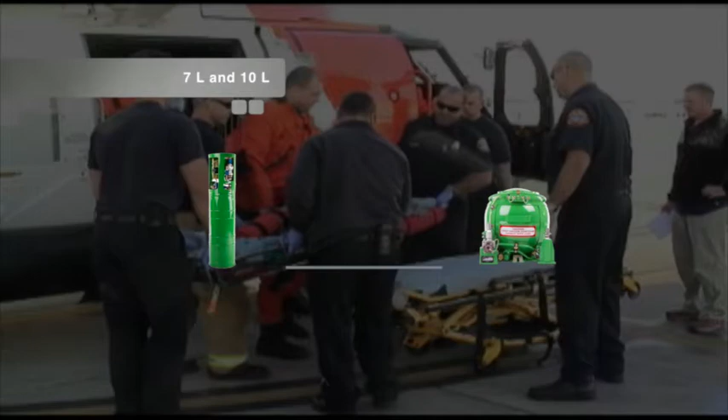The following information should be used as a general guide for the inspection and maintenance, filling, draining, purging, and testing of the 7-liter and 10-liter liquid oxygen converters. These units are instrumental in creating an oxygen system capable of supplying gaseous oxygen for patient therapy, and are used on board rotary wing and fixed wing aircraft to store oxygen in liquid form.

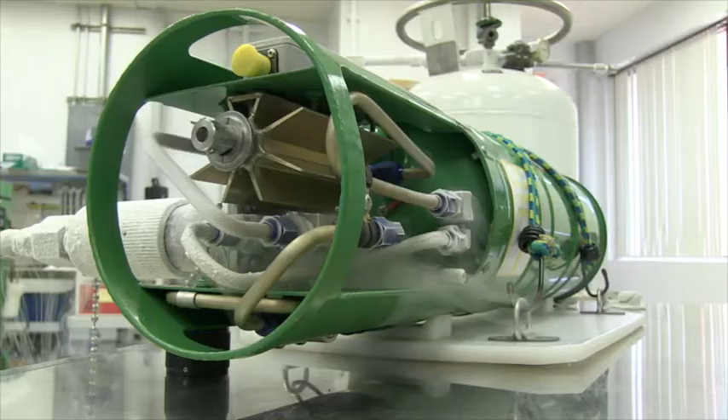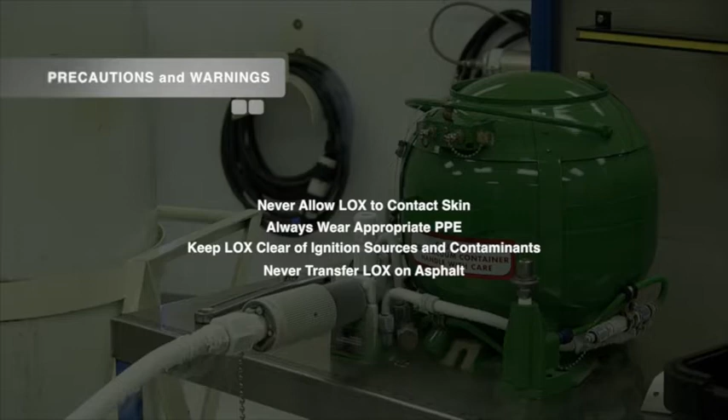Before beginning any of the following procedures, take time to become familiar with the risks associated with liquid oxygen. Never allow LOX to contact skin. Always wear appropriate personal protective equipment, also known as PPE. Be sure to keep LOX clear of ignition sources, contaminants, and remember to never transfer LOX on asphalt. For more details on LOX precautions, handling, hazards, and properties, refer to your specified document, operator's manual, technical order, or equivalent.

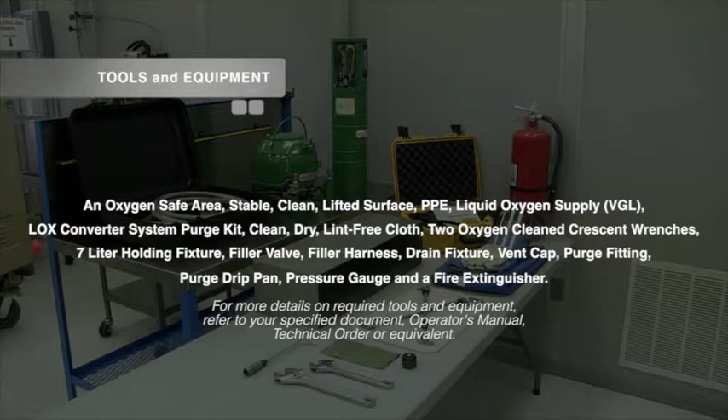To prepare for inspection and maintenance, filling, draining, purging, and testing of the 7-liter and 10-liter LOX converters, it is a good idea to first gather all the required tools and equipment needed for each procedure. Items needed include an oxygen-safe area to perform the procedures, a stable, clean, lifted surface such as a counter or table, personal protective equipment or PPE, a liquid oxygen supply such as a VGL, a liquid oxygen converter system purge kit, a clean, dry, lint-free cloth, 2 oxygen-clean crescent wrenches, a 7-liter holding fixture, a filler valve, a filler harness, a drain fixture, vent cap, purge fitting, purge drip pan, pressure gauge, and a fire extinguisher. For more details on required tools and equipment, refer to your specified document, operator's manual, technical order, or equivalent.

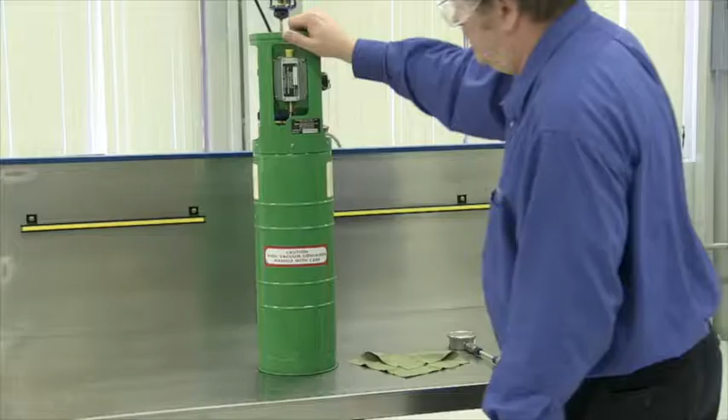It is recommended to complete a general inspection on the LOX converter units at least once a month. When performing general inspections, be sure to check the converter for any damage that could possibly affect system performance, such as broken or missing components, severe dents, or missing fasteners.

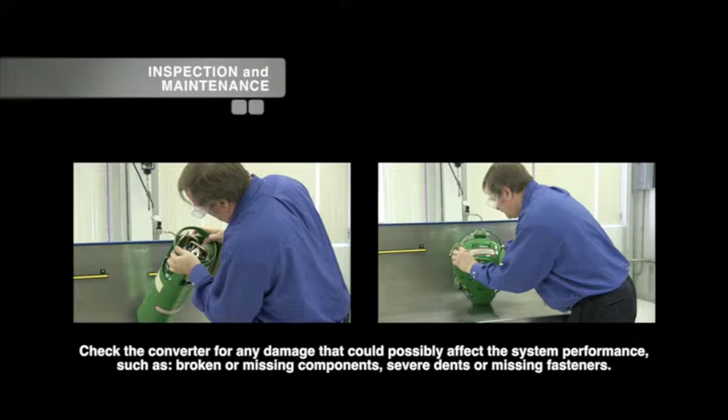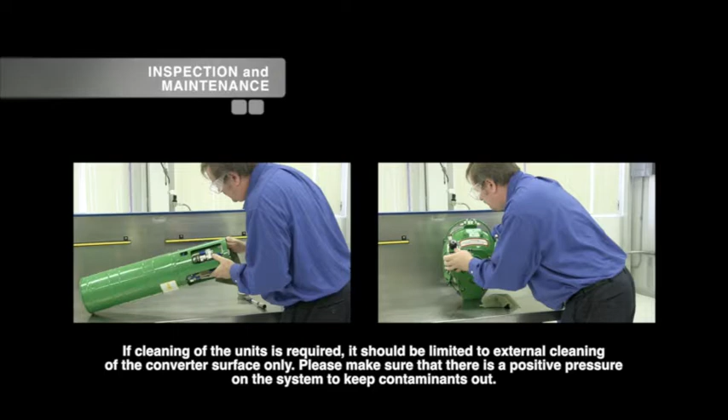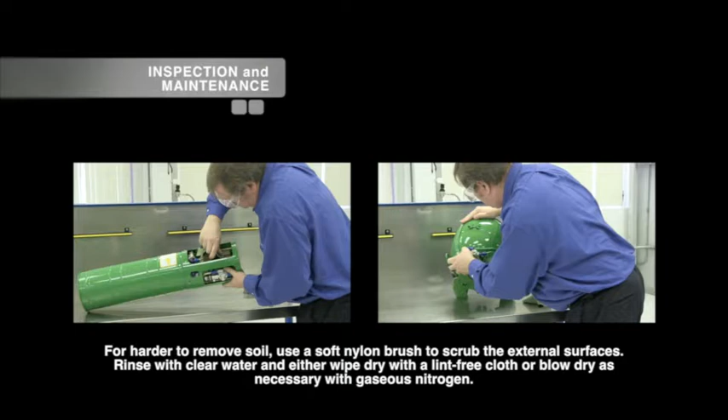If cleaning of the units is required, it should be limited to external cleaning of the converter surface only. Please make sure there is a positive pressure on the system to keep contaminants out. To properly clean the units, use a soft lint-free cloth and a solution of soap and water. For harder to remove soil, use a soft nylon brush to scrub the external surfaces. Rinse with clear water and either wipe dry with lint-free cloth or blow dry as necessary with gaseous nitrogen.

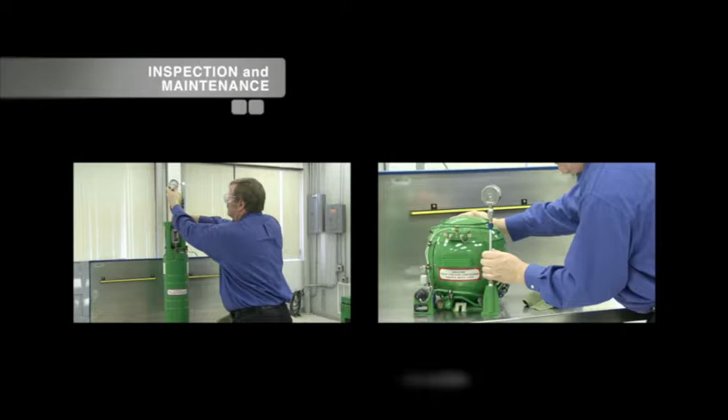If any condition exists from the preceding inspection steps that make the system unable to perform its intended function, return the system to an appropriate repair facility for corrective action. For more details on unit inspection or maintenance, refer to your specified document, operator's manual, technical order, or equivalent.

Before beginning the filling procedure, please note that those persons not directly involved in oxygen servicing operations should stay outside of a 25-foot radius of the liquid oxygen servicing area. Servicing personnel, please ensure that appropriate PPE is donned and that your hands, feet, clothing, etc. are clean and free of petroleum-based products before filling.

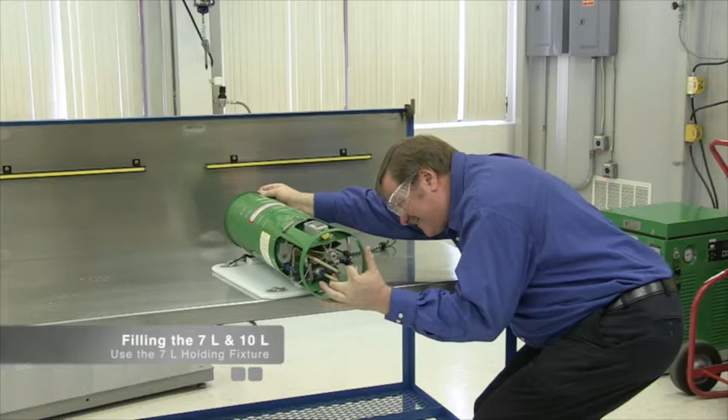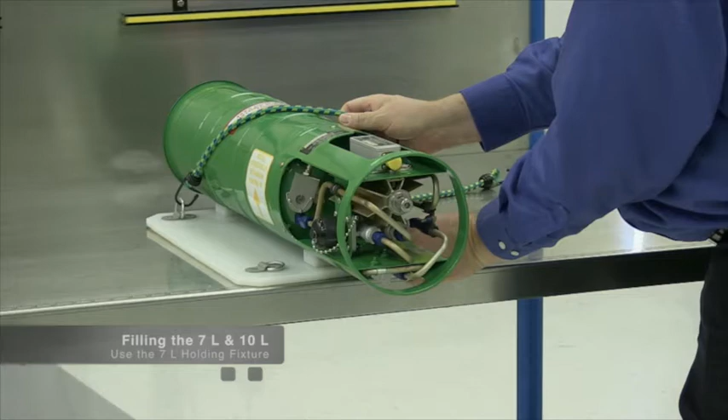While the 10-liter converter sits flat and level, the 7-liter can be filled in either a vertical or horizontal orientation. It is recommended to fill the 7-liter in the horizontal position. To fill the 7-liter in the horizontal position, a holding fixture should be used for proper holding and orientation. Note, if filling the 7-liter in the vertical position, be sure that LOX from the vent port does not collect on top of the converter. This could freeze the vacuum pot plug, causing degradation of the container vacuum.

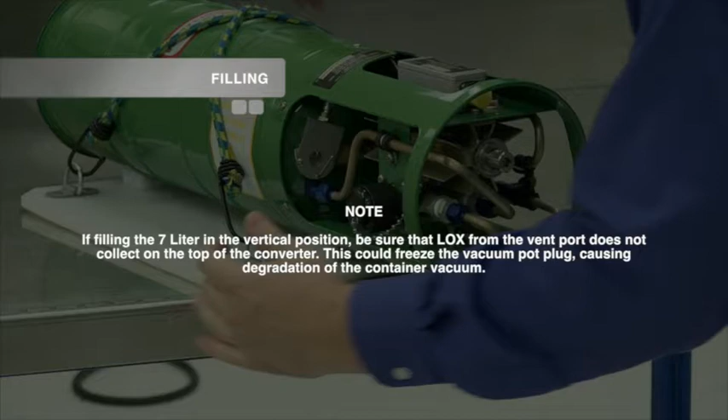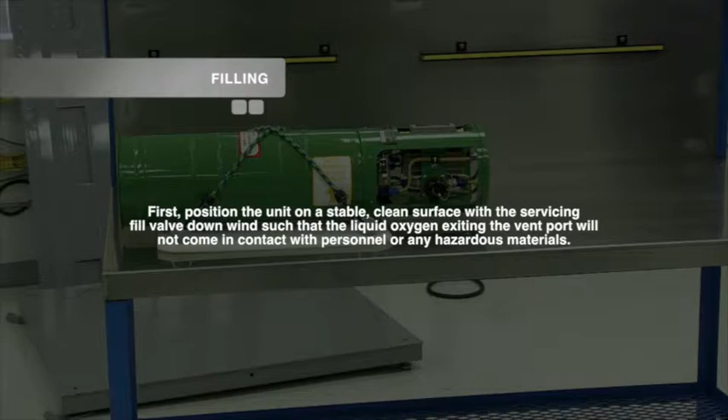To begin the filling procedure, first position the unit on a stable, clean surface with the servicing fill valve downwind such that the liquid oxygen exiting the vent port will not come in contact with personnel or any hazardous materials. Ascertain that the vent openings on both the LOX servicing tank and the unit to be filled are unobstructed.

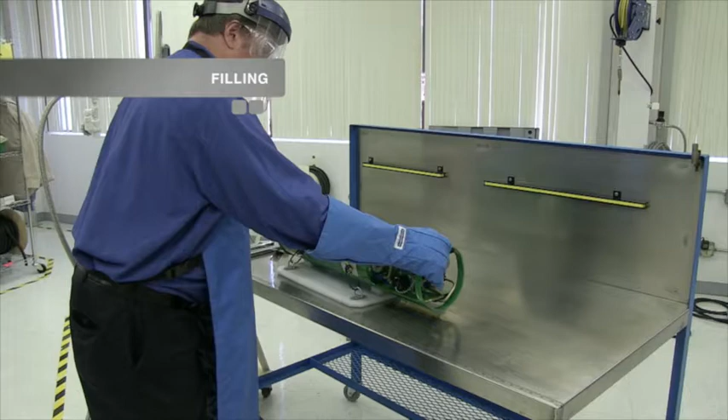Locate the converter fill port and remove the valve dust cap. Inspect the opening of the converter fill valve and the servicing hose fill valve for contamination or moisture. Remove any contamination or moisture with a dry, clean, lint-free cloth.

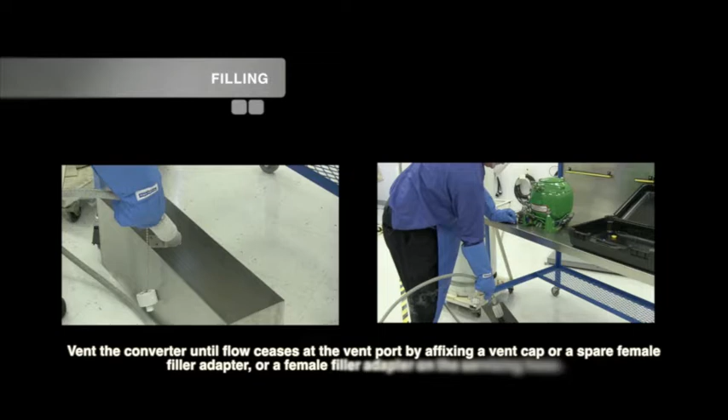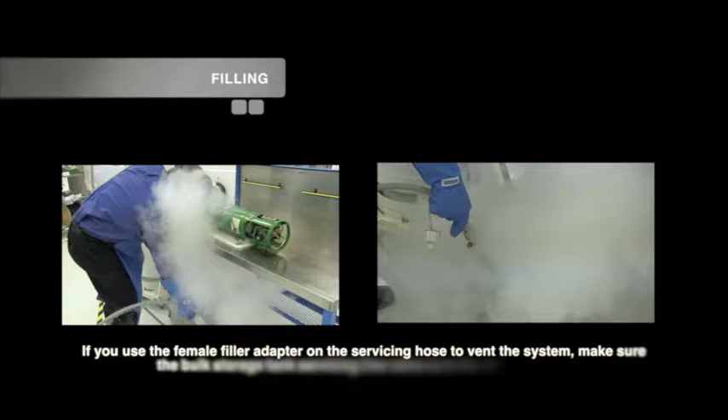Vent the converter until flow ceases at the vent port by affixing a vent cap, or a spare female filler adapter, or a female filler adapter on the servicing hose. If you use the female filler adapter on the servicing hose to vent the system, make sure the bulk storage tank servicing line valve is in the off position.

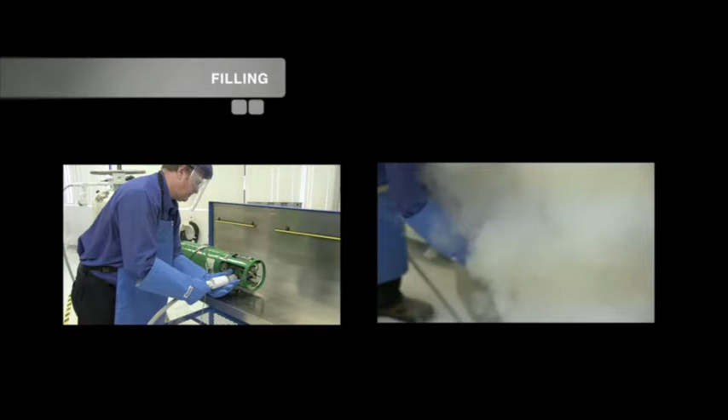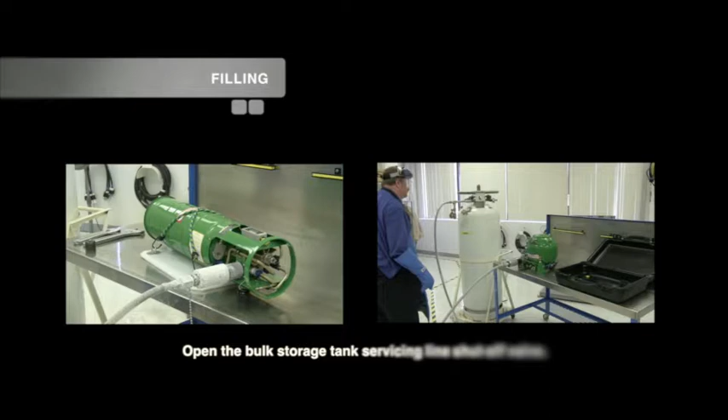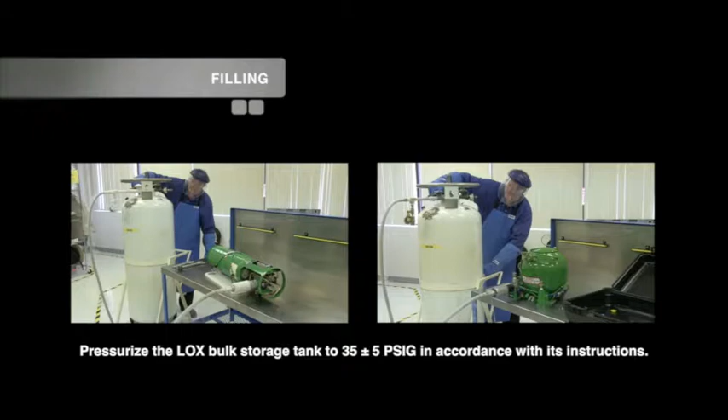Connect the servicing hose filler adapter to the converter fill valve and proceed to fill in accordance with the instructions from the servicing tank. Open the bulk storage tank servicing line shutoff valve. Pressurize the LOX bulk storage tank to 35 plus or minus 5 psig in accordance with its instructions, and maintain that pressure in the storage tank.

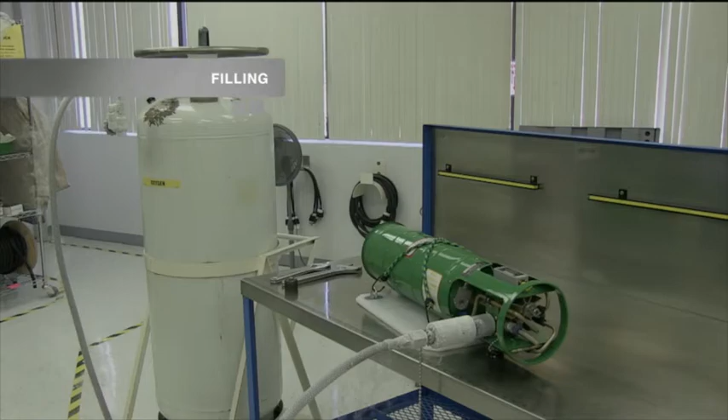Leaking from any component or connection is a potentially dangerous situation. Any steady drip from a servicing nozzle that can be contained in the drip pan of the system is acceptable. Holding the hose, thereby removing the downward tension from the connections, can sometimes eliminate dripping.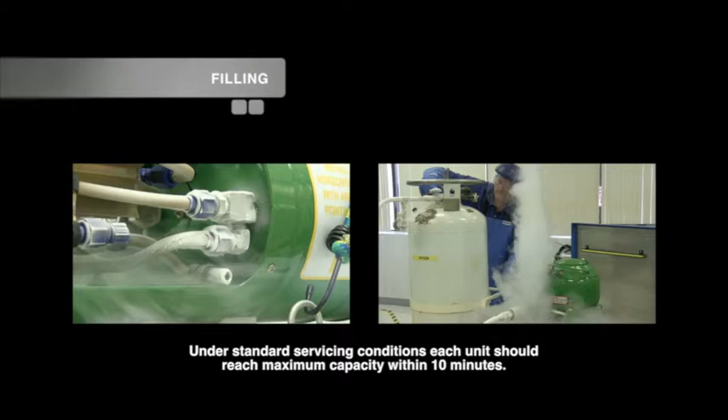Under standard servicing conditions, each unit should reach maximum capacity within 10 minutes. When a continuous stream of LOX flows from the vent port of the unit, disconnect the servicing hose from the unit, close the servicing hose shutoff valve, and vent the storage tank in accordance with the instructions provided. Reinstall the dust cap on the converter fill port.

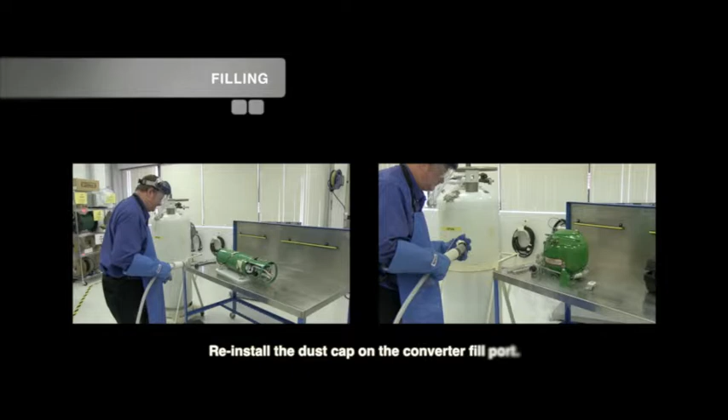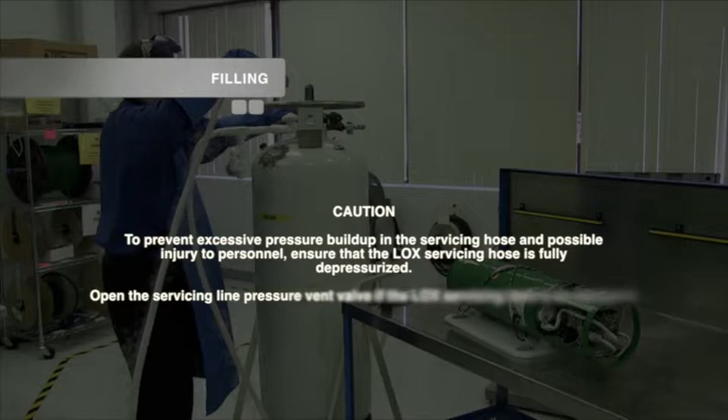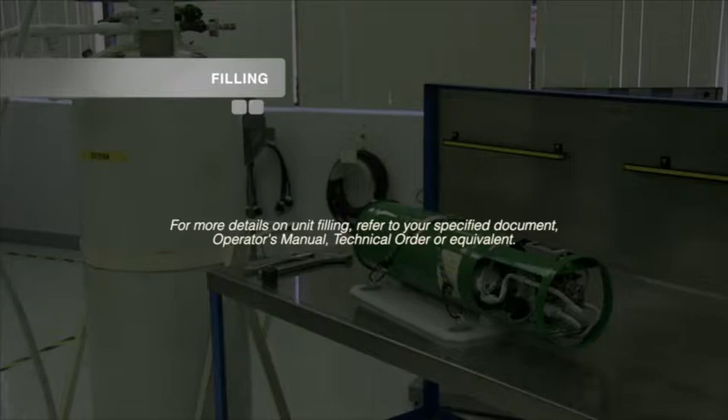Caution: to prevent excessive pressure buildup in the servicing hose and possible injury to personnel, ensure that the LOX servicing hose is fully depressurized. Open the servicing line pressure vent valve if the LOX servicing tank is so equipped. For more details on unit filling, refer to your specified document, operator's manual, technical order, or equivalent.

Draining of LOX from the unit should be done upon occurrence of system malfunction, failure to pass inspection, when placing in storage or shipping, or when performing maintenance. Place the unit in an area free from dirt and hydrocarbons. For the 7-liter, also place the unit in a horizontal holding fixture.

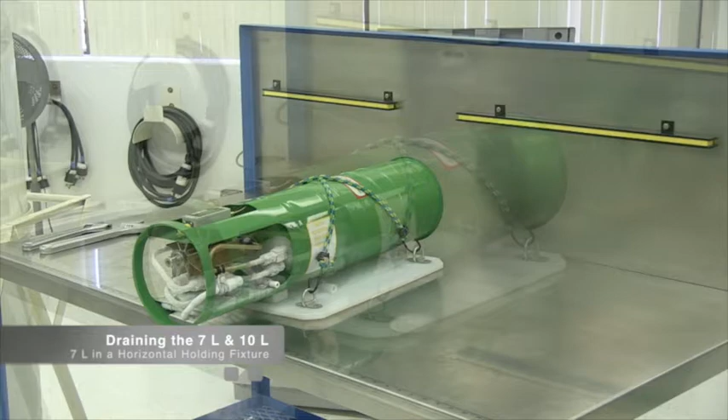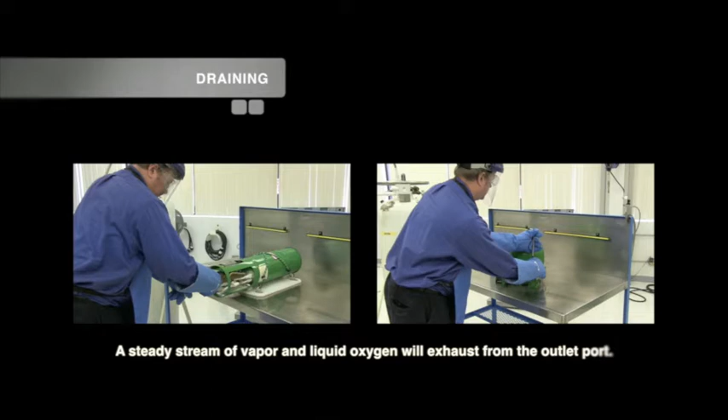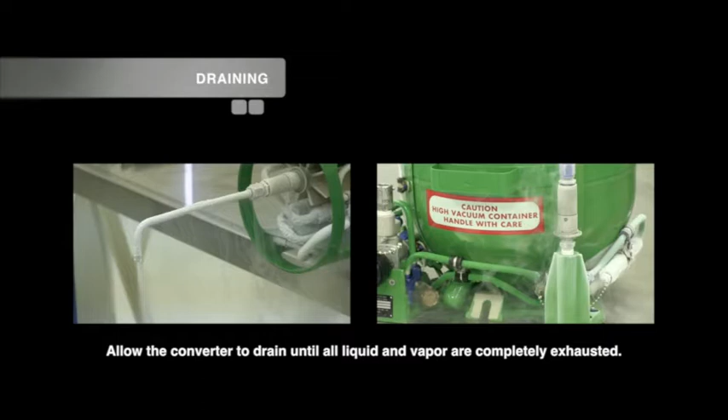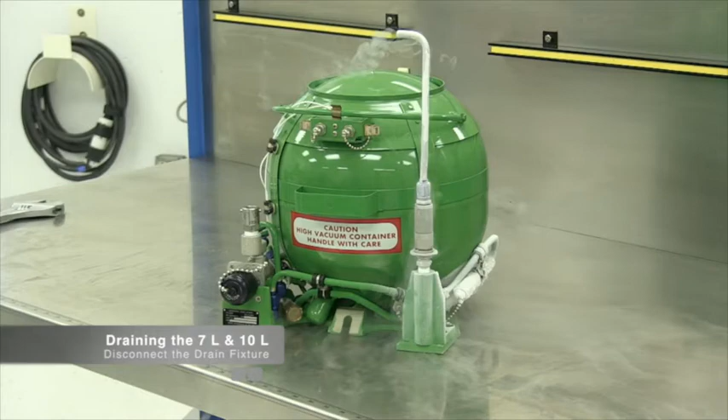Place an overflow catch container at the outlet port end of the system and attach the drain fixture to the supply port. A steady stream of vapor and liquid oxygen will exhaust from the outlet port. Allow the converter to drain until all liquid and vapor are completely exhausted. When draining is complete, disconnect the drain fixture from the supply port. For more details on unit draining, refer to your specified document, operator's manual, technical order, or equivalent.

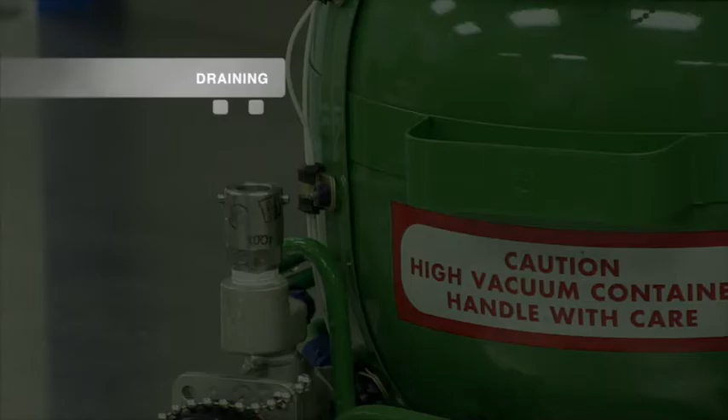The 7-liter and 10-liter LOX converters should be hot purged at scheduled intervals not to exceed 3 months, exclusive of any interim events that makes purging necessary. The converter should also be purged if the unit has been opened, the LOX quantity gauge is not functioning properly, as well as prior to shipment or storage.

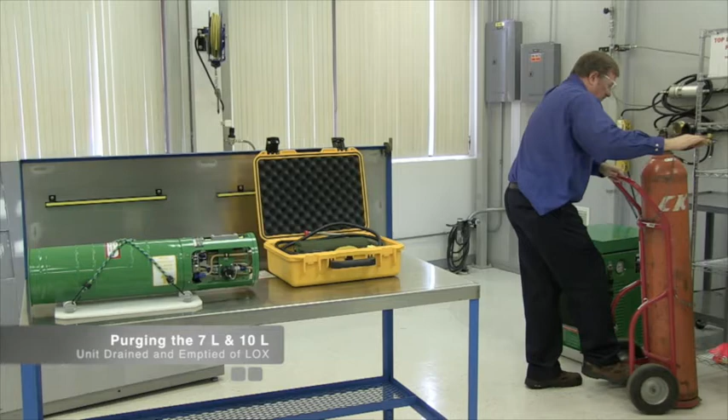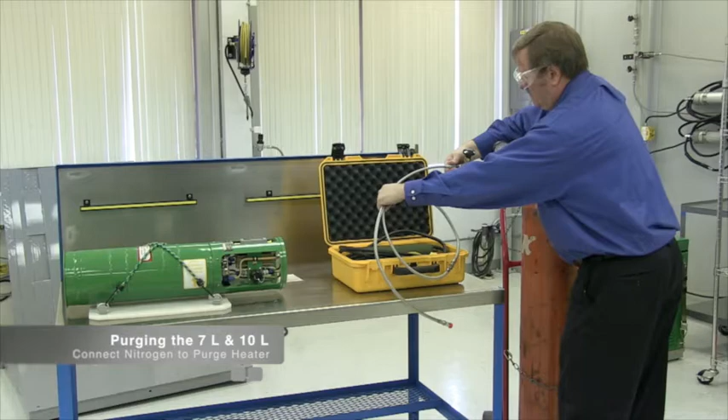For the purging procedure, you will need the items contained in the liquid oxygen converter system purge kit. When purging the 7-liter and 10-liter converters, first ascertain that the unit has been drained and completely emptied of LOX. With the unit and purge heater positioned on a clean work area, connect the approved nitrogen source product equipped with a shutoff valve and a regulator capable of controlling the supply pressure from 0 to 100 psig to the inlet of the purge heater.

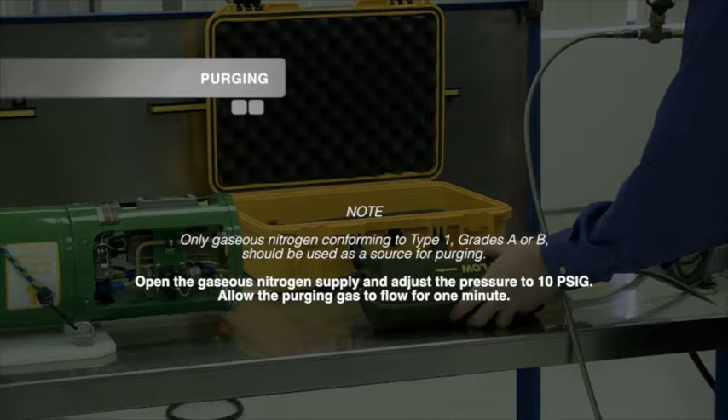Note: only gaseous nitrogen conforming to type 1, grades A or B, should be used as a source for purging. Open the gaseous nitrogen supply and adjust the pressure to 10 psig. Allow the purging gas to flow for 1 minute.

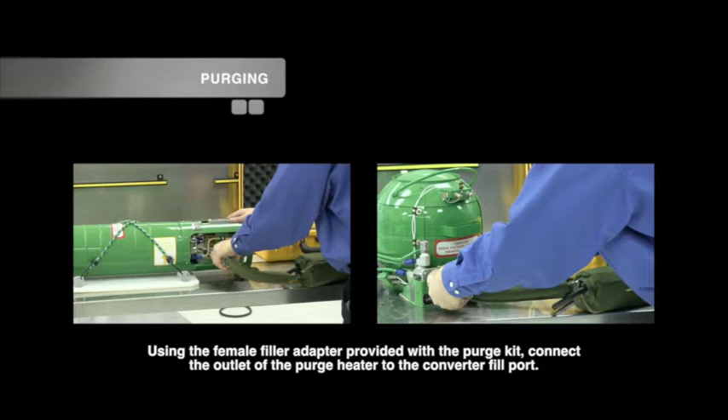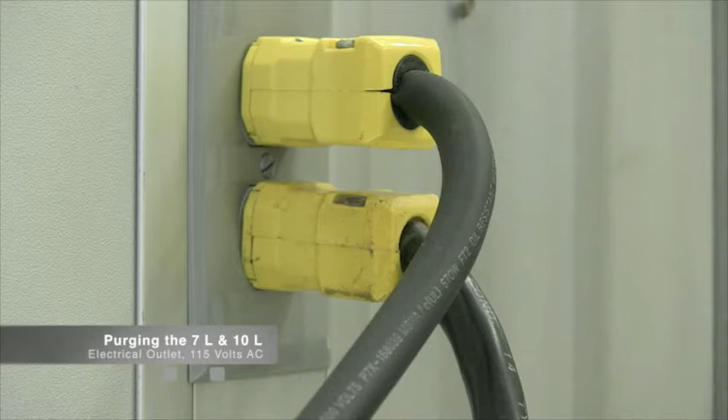Using the female filler adapter provided with the purge kit, connect the outlet of the purge heater to the converter fill port. With the purge kit circuit breaker switches in the off position, plug the power cable from the purge heater into an electrical outlet, providing a source of 115 volts AC. Place the circuit breaker switches in the on position.

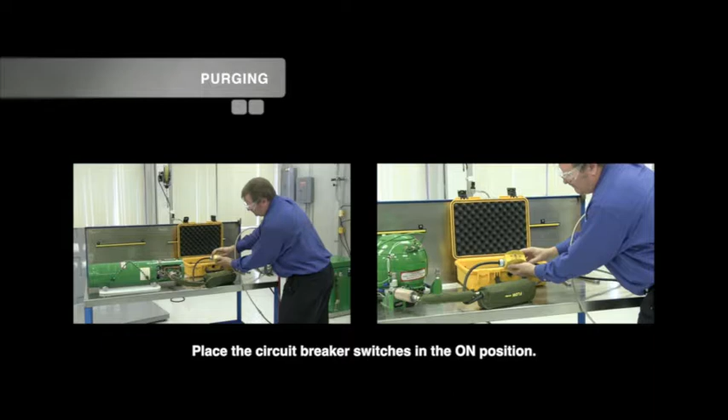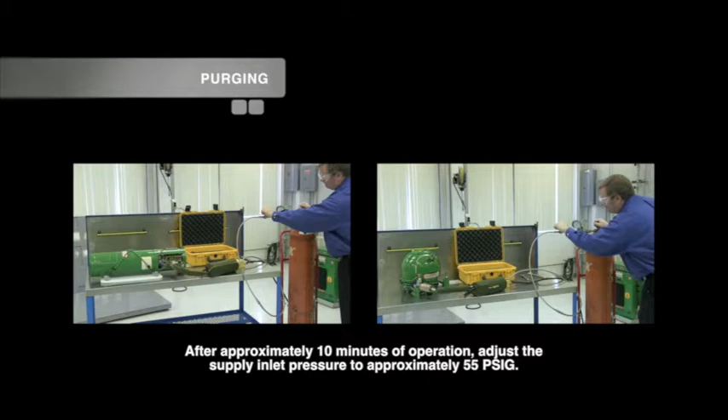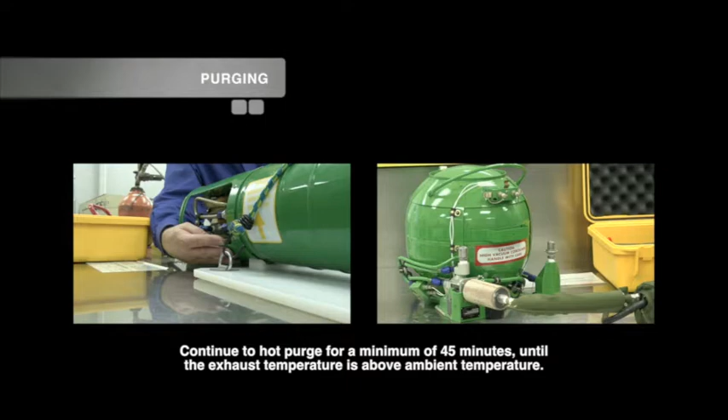After approximately 10 minutes of operation, adjust the supply inlet pressure to approximately 55 psig. When the outlet gas gets warmer than ambient, you can start the process. Continue to hot purge for a minimum of 45 minutes until the exhaust temperature is above ambient temperature. After completion of hot purging, turn the purge heater off and cold purge for a minimum of 15 minutes or until components have returned to ambient temperature.

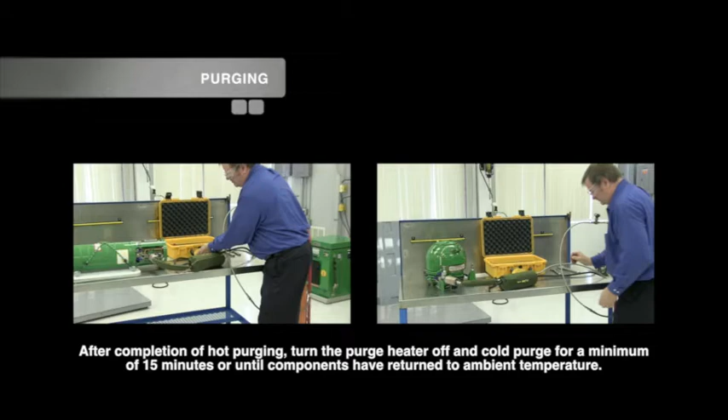Disconnect the purge heater filler adapter from the converter fill port, trapping pressure inside the system. Note, the converter will not retain a positive pressure for an indefinite period of time. Depletion of this pressure does not signify an abnormal condition.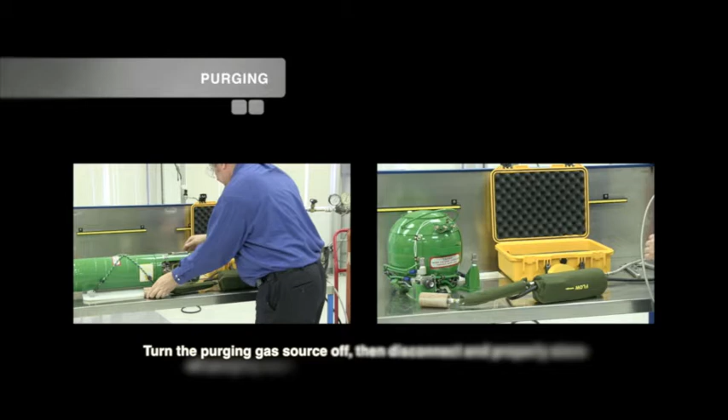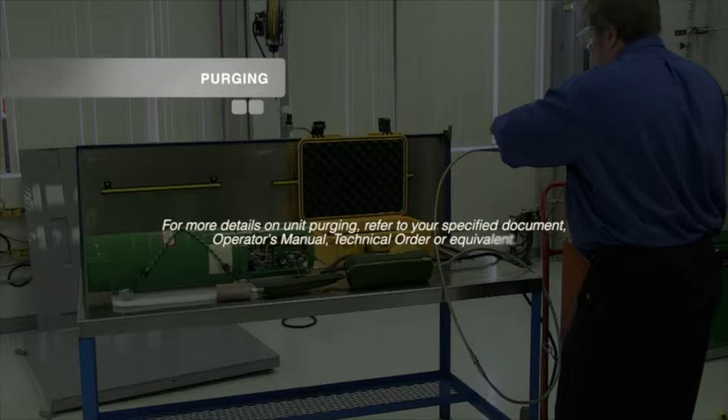Turn the purging gas source off. Then disconnect and properly store all purging appliances. Replace the fill port dust cap. For more details on unit purging, refer to your specified document, operator's manual, technical order, or equivalent.

Testing the 7-liter and 10-liter LOX converters. Due to the limitation of test equipment available to the majority of users, testing of the converter is limited to those tests required to establish functionality and pressure integrity of the converter. All tests listed in this section shall be conducted at normal atmospheric pressure and humidity and at room temperatures of 55 to 95 degrees Fahrenheit.

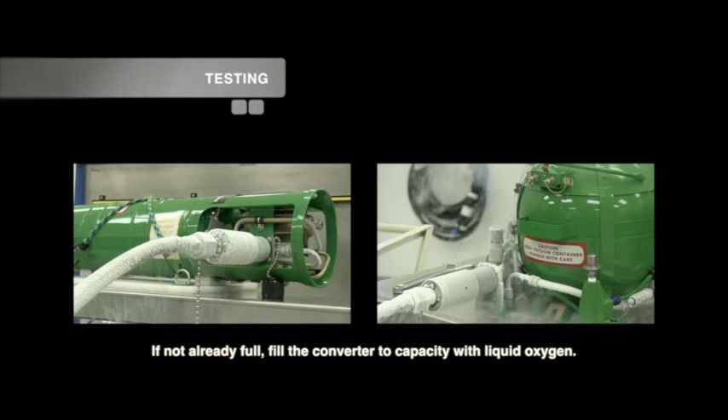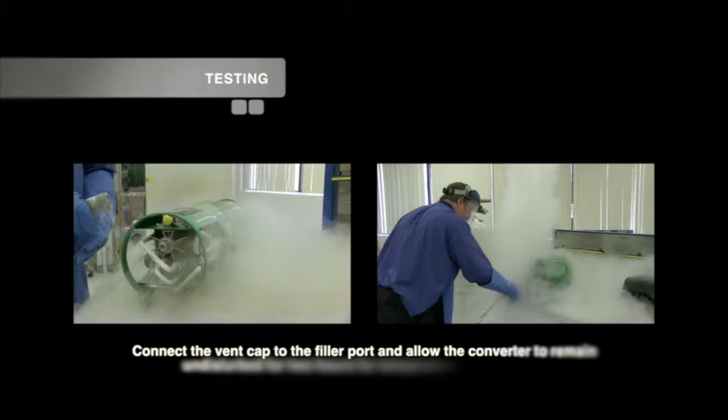Vented evaporation loss test. The purpose of this test is to evaluate the ability of the converter dewar to retain liquid over a 24-hour period and should be done immediately after a unit is filled. If not already full, fill the converter to capacity with liquid oxygen. Connect the vent cap to the filler port and allow the converter to remain undisturbed for 2 hours for temperature stabilization.

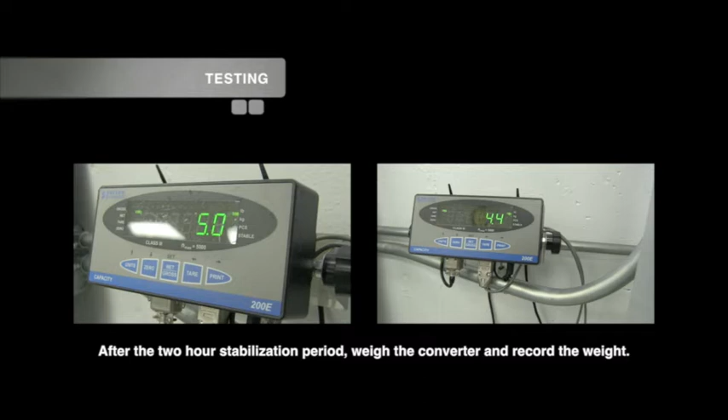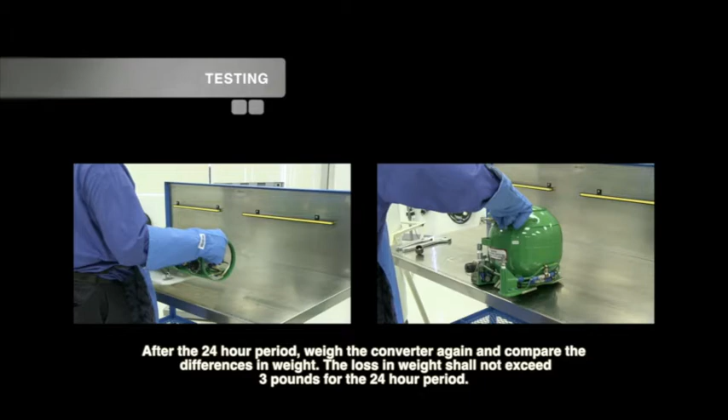After the 2-hour stabilization period, weigh the converter and record the weight. Allow the converter to remain undisturbed for an additional 24 hours. After the 24-hour period, weigh the converter again and compare the differences in weight. The loss in weight shall not exceed 3 pounds for the 24-hour period. If the converter does not meet this requirement, return the converter to Essex for repair.

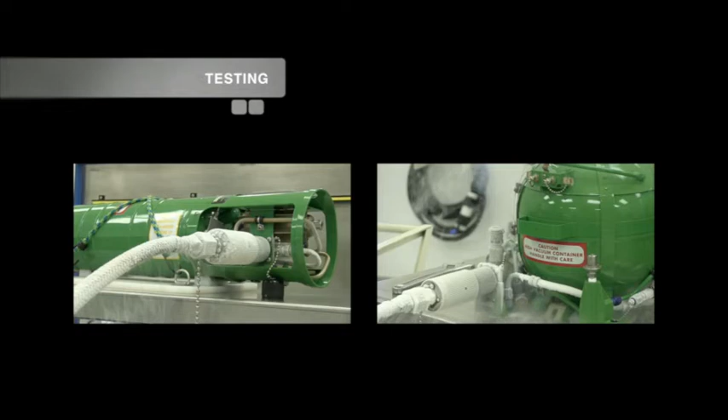Build-up evaporation loss test. The purpose of this test is to evaluate the ability of the complete converter to retain liquid over a 24-hour period. This test is normally conducted immediately following the vented evaporation loss test. If not already full, fill the converter to capacity with liquid oxygen.

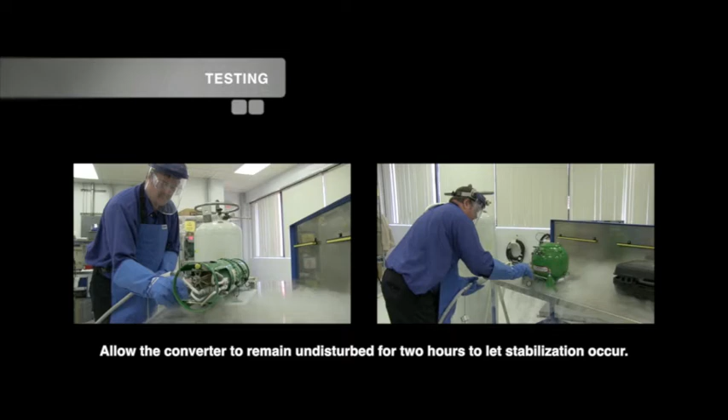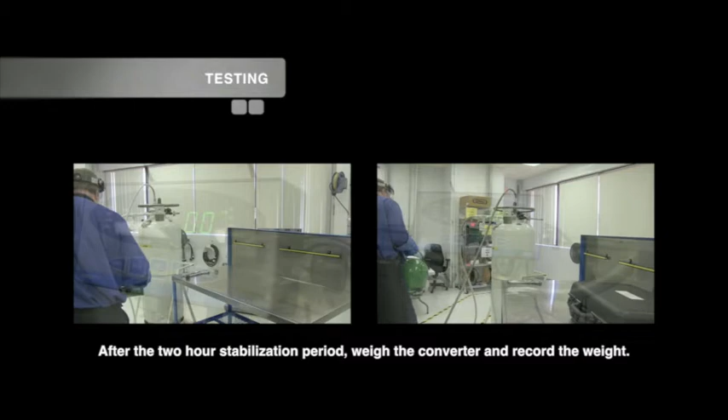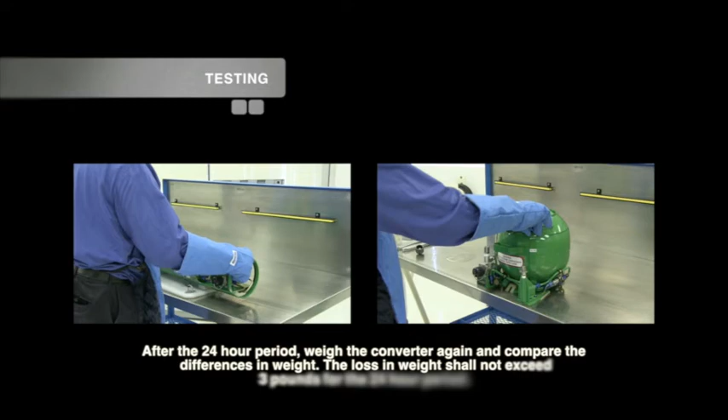Allow the converter to remain undisturbed for 2 hours to let stabilization occur. After the 2-hour stabilization period, weigh the converter and record the weight. Allow the converter to remain undisturbed for an additional 24 hours. After the 24-hour period, weigh the converter again and compare the differences in weight. The loss in weight shall not exceed 3 pounds for the 24-hour period. If the converter does not meet this requirement, return the converter to Essex for repair. For more details on unit testing, refer to your specified document, operator's manual, technical order, or equivalent.